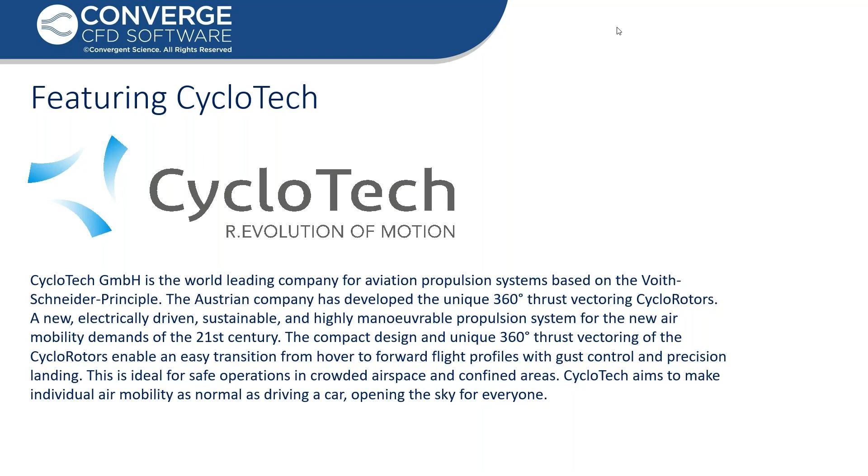How we utilize CONVERGE CFD for our cyclorotor simulations. In this webinar, I will briefly introduce you to the company, and then I will give you a short theoretical background regarding the working principle of the cyclorotor. In the second half of my webinar, I will bring you the CFD results. I also prepared 3 different CFD example cases. I hope you will enjoy it. So let's start.

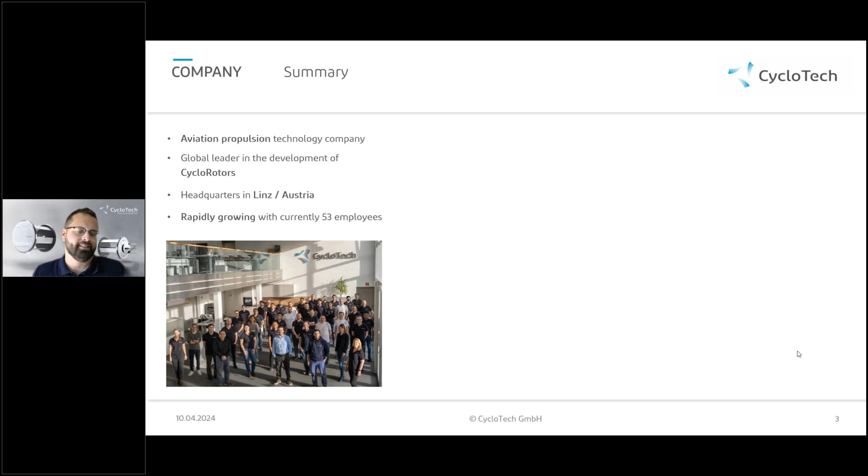CycloTech is an aviation propulsion technology company which is a global leader in the development of cyclorotors. The headquarters is in Linz in Austria, and it is rapidly growing with currently more than 50 employees. I can tell you when I joined CycloTech 2.5 years ago, we were less than 20. So it really has this buzzing startup environment that I really like.

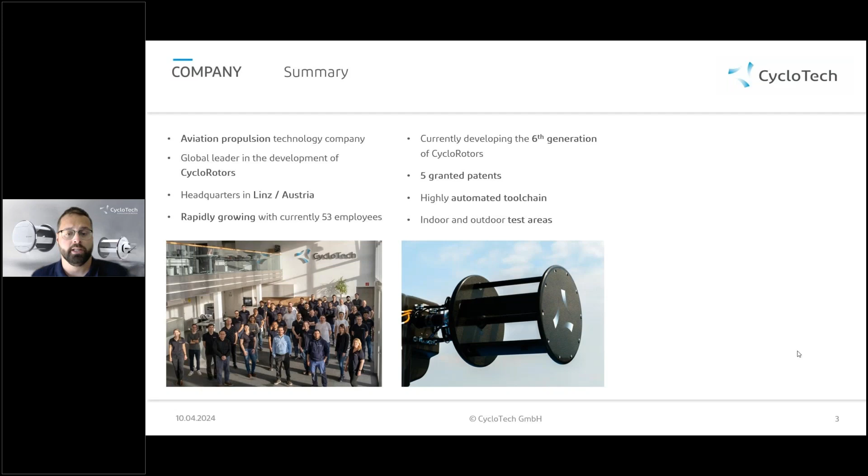Our main focus is the cyclorotor. Currently, we are developing the 6th generation of our cyclorotors. We were granted 5 different patents. We own a highly automated tool chain, and we have access to indoor and outdoor test areas. As Mattia mentioned, our vision is to open the sky for everyone, or let's say make individual air mobility as normal as driving a car. And we truly believe that the best way for this is powering the future eVTOL vehicles with our cyclorotors.

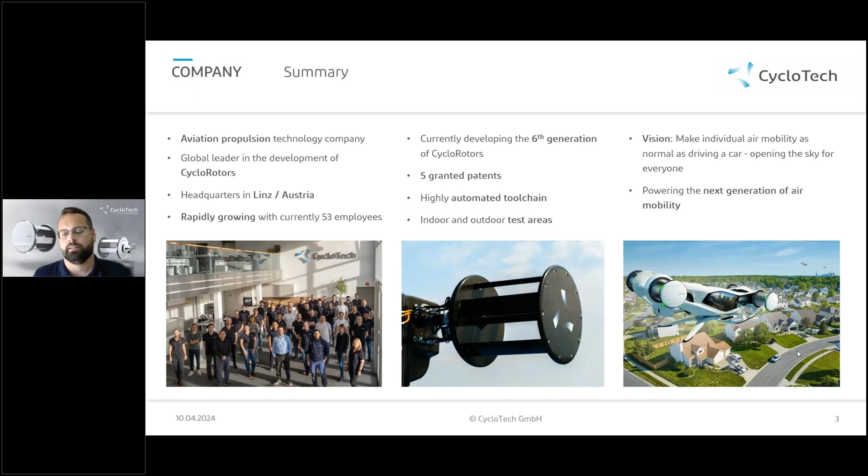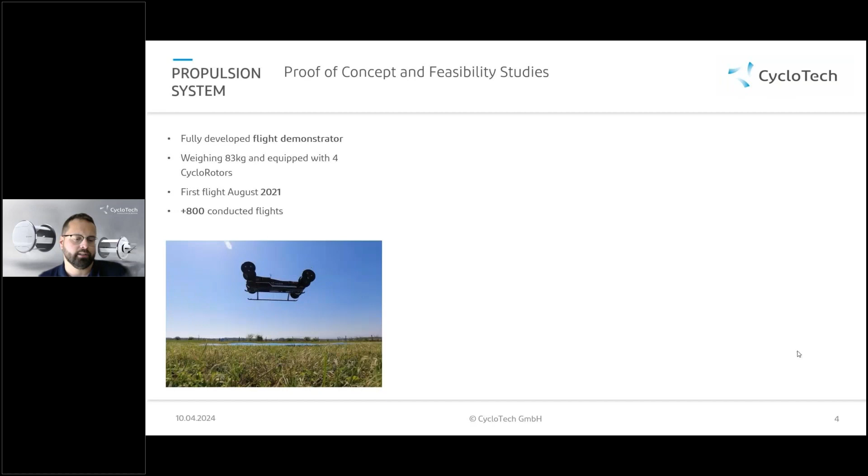We have a fully developed flight demonstrator, which weighs around 80 kg and is equipped with 4 cyclorotors. The first free flight was in August 2021, and from then on we conducted more than 800 flights. As you can see, this demonstrator can safely take off, land, and maneuver. Apart from the proof of concept, we also have feasibility studies.

One of the major ones was the eVTOL cargo drone, which was a joint feasibility study with Yamato Holdings. Yamato Holdings is one of the market leaders for parcel logistics, and they could benefit a lot from an advanced aerial vehicle with high maneuver capability. For that purpose, we designed together the drone depicted here, and it has a 45-kilogram payload and could fly up to 40-kilometer range. Both parties, Yamato and CycloTech, published a white paper about it. So if you are interested, I encourage you to look up these papers and read them.

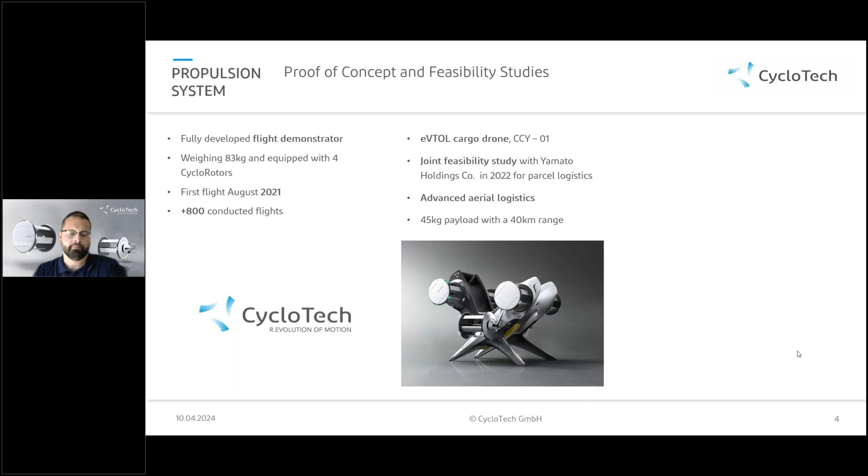After the Yamato cargo drone, we decided to come up with our aircar study, and this is how the CruiseUp was born last year. CruiseUp is an aircar concept with 6 cyclorotors, and as you can see, 2 of these cyclorotors are placed along the longitudinal axis of the vehicle. Because of this, the vehicle can easily go sideways without tilting the aircar. This is quite a unique feature among eVTOL aircars.

The top speed of this vehicle is 150 km per hour, and it has a range of 100 km. The 6 rotors also increase the redundancy of this vehicle, so in the event of one rotor failure, the aircar can land safely.

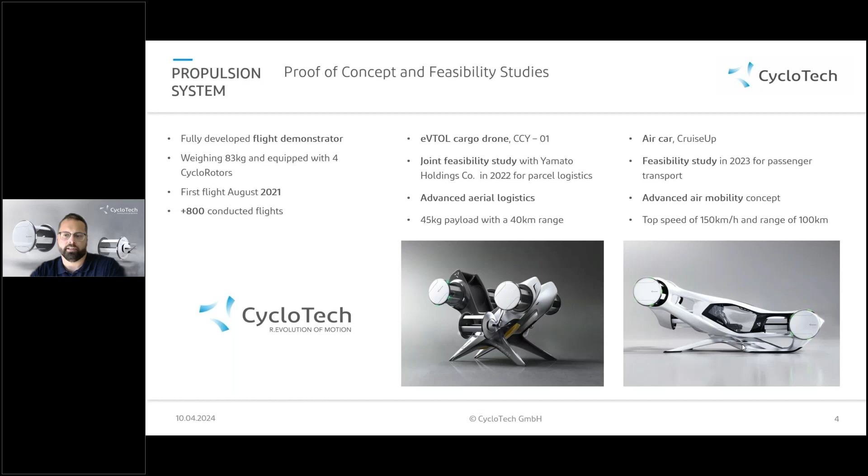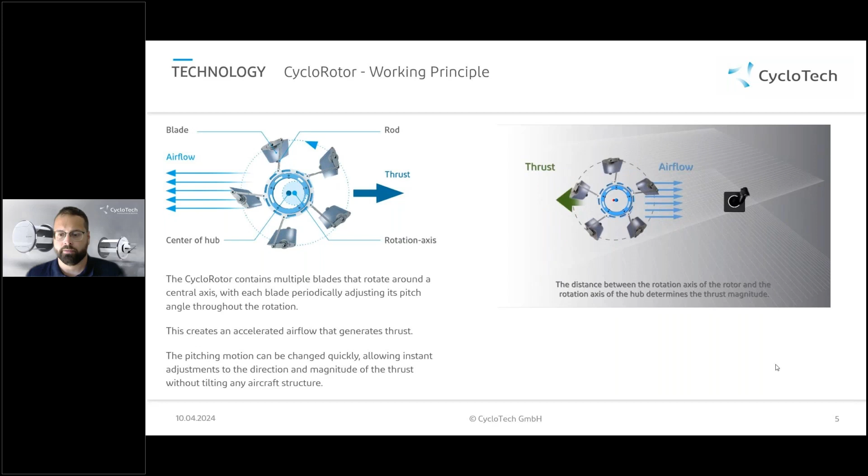An eccentric position of the hub causes periodical change of the angle of attack of each wing during one revolution. This accelerates the airflow through the rotor and results in a thrust. The distance between the rotation axis of the rotor and the rotation axis of the hub determines the thrust magnitude, while the position of the rotation axis of the hub in peripheral direction determines the thrust direction.

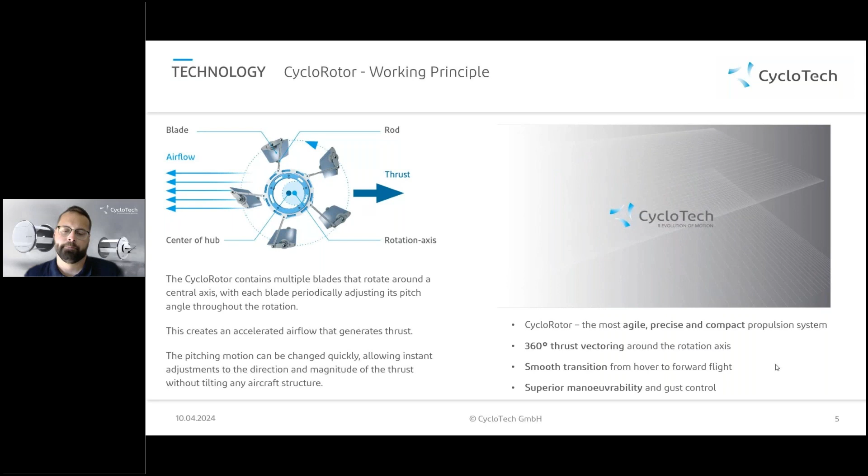To sum up, the cyclorotor is the most agile, precise, and compact propulsion system. With its truly 360-degree thrust vectoring around the rotation axis, it delivers smooth transition from hover to forward flight. And also, it provides superior maneuverability and gust control.

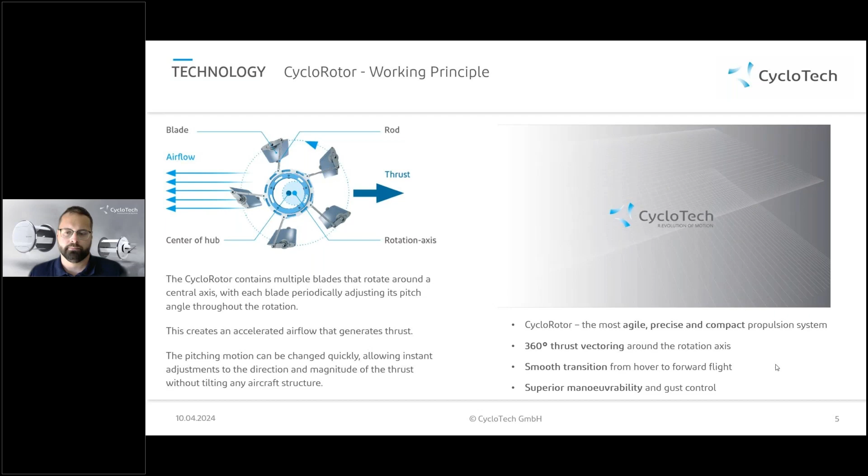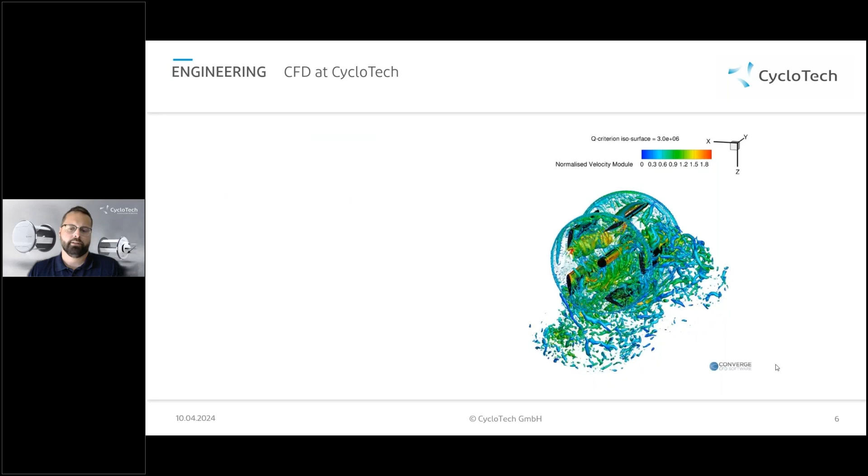Finally, we arrived at the CFD part of this webinar. I think this will be the most interesting for many of you. First, I would like to show you the areas where we use CFD at CycloTech. Then I will speak about what we benefit the most from in CONVERGE. And as I already mentioned, in the end, I will show you 3 example cases. 2 of these example cases will be with a Cartesian mesh, one with the acoustic analogy, and there will be an inlaid mesh case as well.

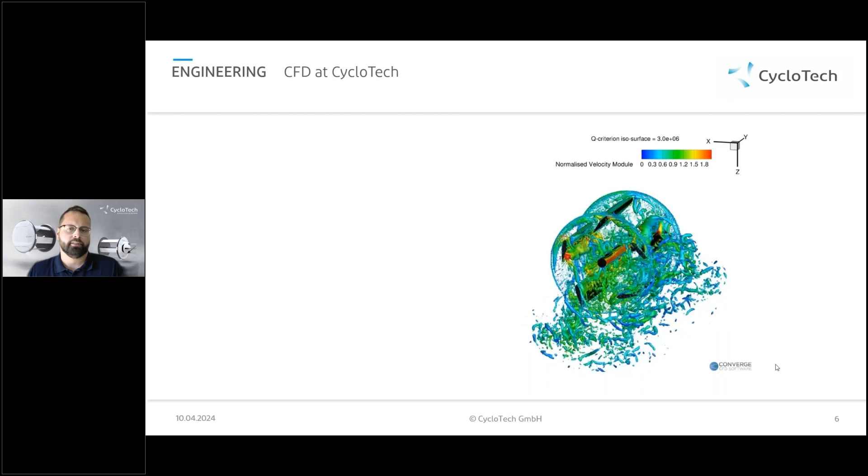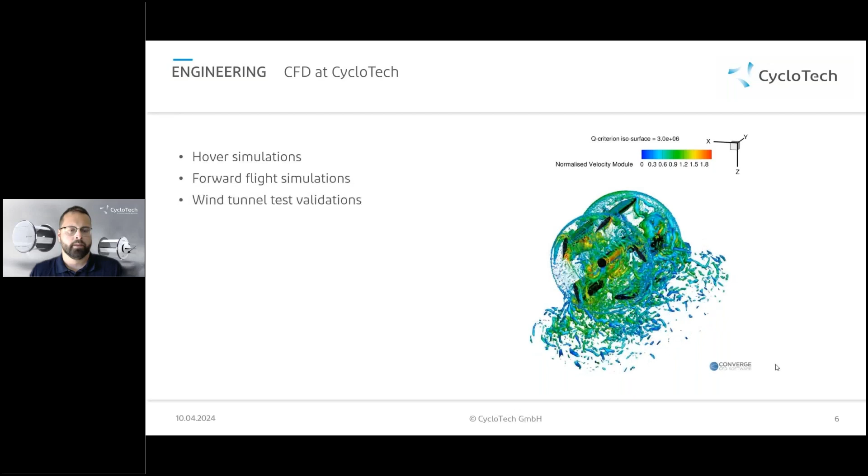So, at CycloTech, we do hover simulations, which means simulations without incoming speed. But we also do simulations with incoming flow. This is what we call forward flight simulations. Of course, we are aiding our design constantly with wind tunnel tests, and we also use these wind tunnel tests to validate our CFD results.

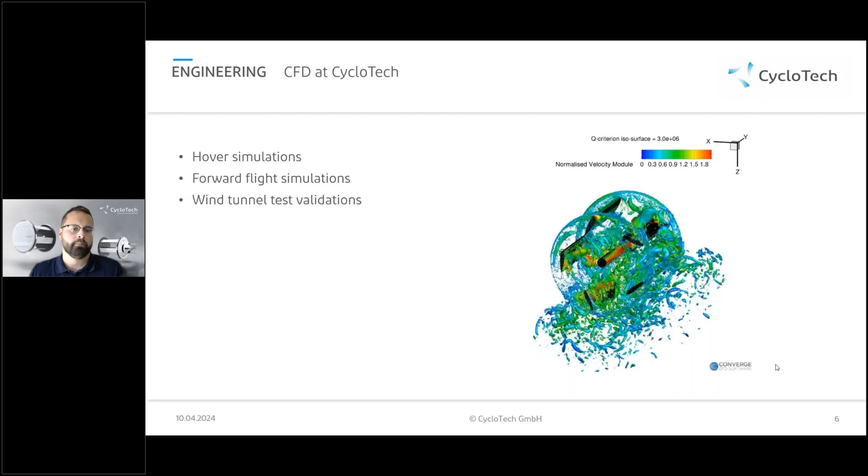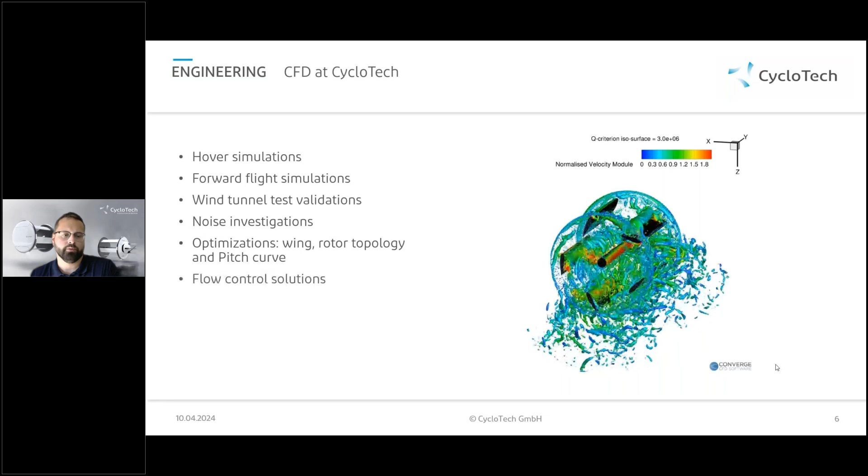Noise is a very important topic for us because we would like to gain public acceptance, and we would like to produce an as silent as possible rotor. Therefore, we also do computational aeroacoustic simulations. If we are talking about rotor development, optimization is a must. We do wing, rotor topology, and pitch curve optimization. Finally, we also use CFD for flow control solutions.

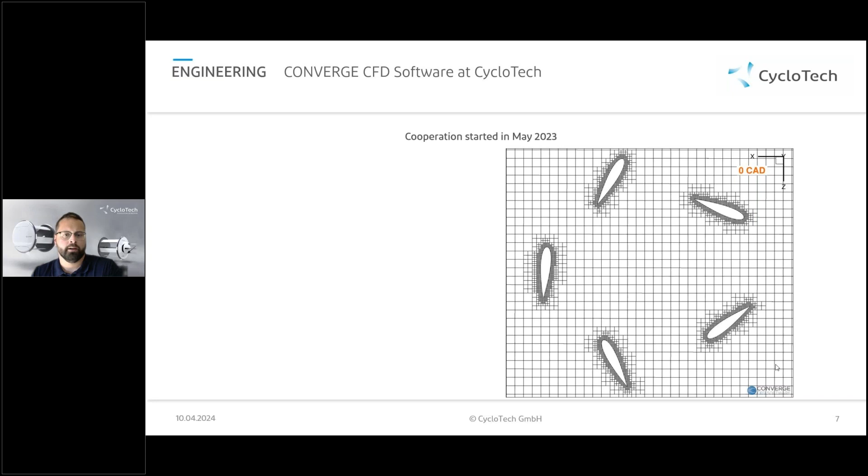So, our cooperation with Convergent Science started last year in May. So we can say that we are relatively new users of CONVERGE, but there are already many things that we like. The first of these is the user friendliness and the ease of use. I guess if you ever used CONVERGE, you know that basically you can learn the software within an afternoon. And basically this is what happened at our company as well. Colleagues without any practical experience of CFD started to use CONVERGE and CFD, and we could therefore increase our productivity.

Of course, after using CONVERGE, we don't want to make a mesh again. We benefit a lot from its autonomous meshing, and we also really like the Adaptive Mesh Refinement feature. Another feature which is very important to us is the ease of introducing complex motion profiles. I guess you have seen that our pitch curve is quite elaborate, but even this elaborate pitch curve can be easily introduced to the software, for instance, in tabulated format. And what is also very important is that the outputs and the inputs of the software are in a well scriptable format. We have custom-made post-processing scripts; I will show you not the scripts, but the results later.

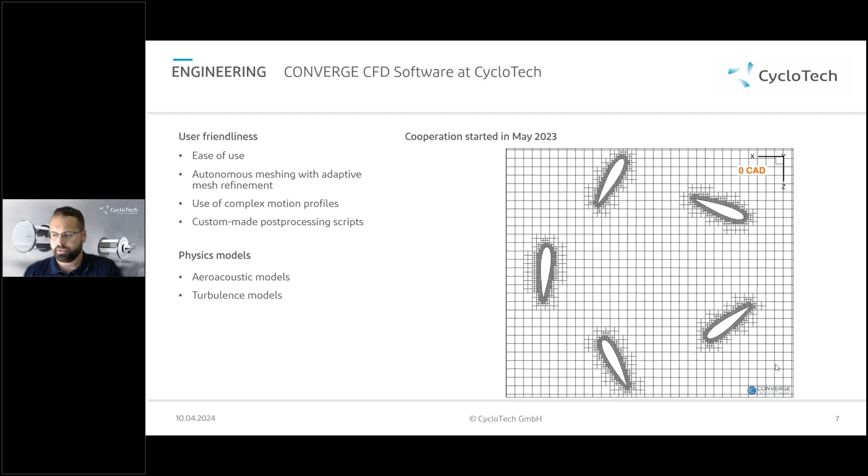We use aeroacoustic models and turbulence models from physics, so we don't use a lot of physics models from CONVERGE, but we are satisfied with what we are using. And we also use advanced features. One of them is the acceleration methods, like the grid scaling. You could see on this video that there was a grid scaling after 140 crank angle degrees. And we also use inlaid meshing.

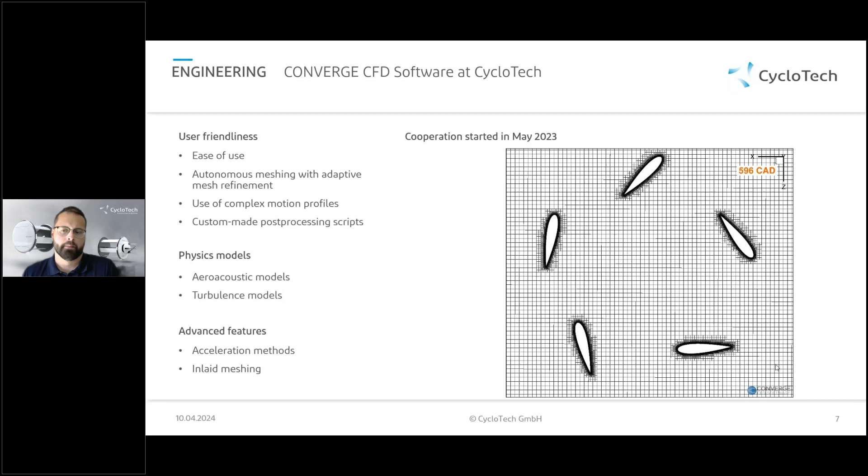If we are speaking about cyclorotors, advance ratio, abbreviated here as AR, is a very important dimensionless number, which is basically the ratio between the incoming flow speed and the rotor peripheral velocity.

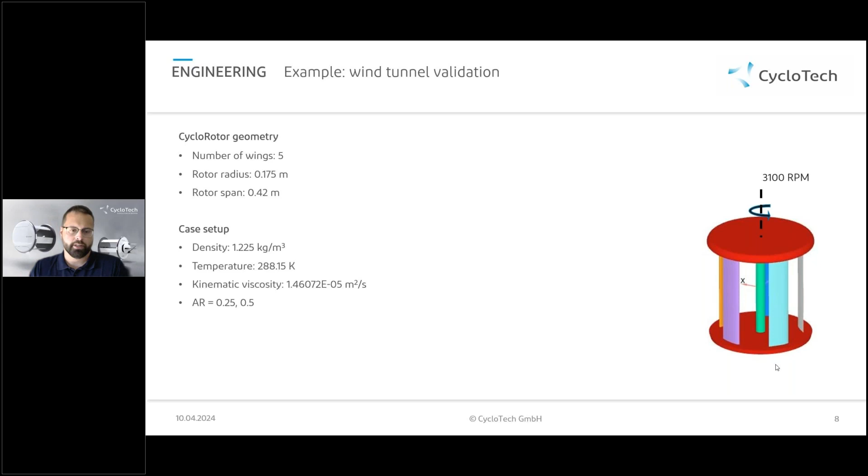Many of you might be more familiar with the term tip speed ratio, which is widely used in the wind turbine industry. I can tell you that the advance ratio is the reciprocal of the tip speed ratio.

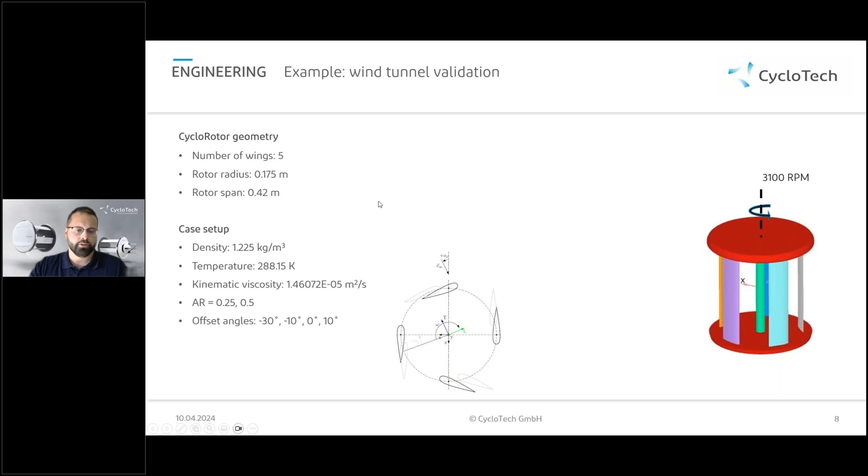Another important definition for us is the offset angle. Here you can see on this schematic picture what the offset angle is. Basically, it is just the angle of the incoming speed. Please note that this is just a schematic picture, so it has nothing to do with the other rotor. You can already see this from the number of wings; there are only 4 wings here. In this wind tunnel validation, we tested offset angles from -30 to 10 degrees.

We used a spherical domain with a diameter of 200 meters, and we filled up this domain with a Cartesian grid with a size of 2.2 million cells. We designed the mesh such that the finest mesh size is 1 millimeter, and this resulted in an average Y plus of around 50. For the turbulence model, we used large eddy simulation, namely the LES sigma closure.

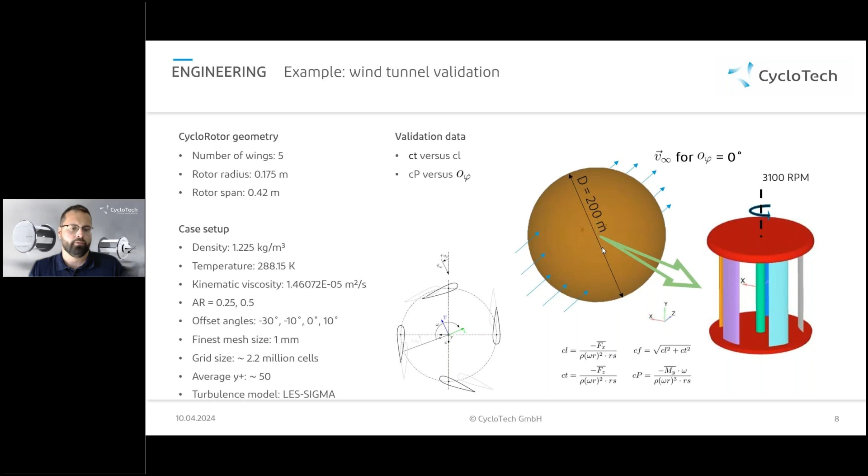For validation of this example case, we use the thrust and lift coefficients, and we also use the power coefficients as a function of the offset angles. Let's have a look at the results. In each result, there will be two sets of curves, 1 and 2, because we simulated this case at two different pitch curves.

In all graphs, the dashed black line represents the experimental results, while the solid green line represents the CONVERGE results. You can see that with the CT and CL parts, the trends are well captured. There is an exceptionally good match at advance ratio 0.25 here.

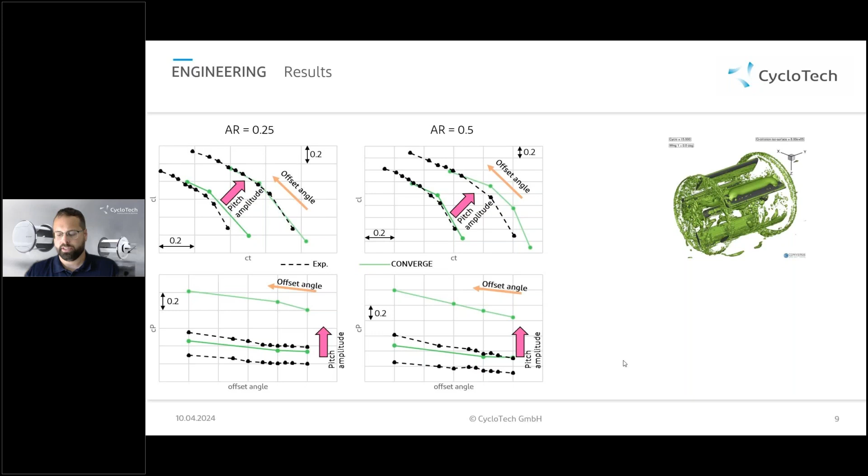However, if we have a look at the power coefficients, we can see that unfortunately the power coefficients are hugely overpredicted. We wanted to know why we have this overprediction, so we decided to do a deeper analysis of the flow field.

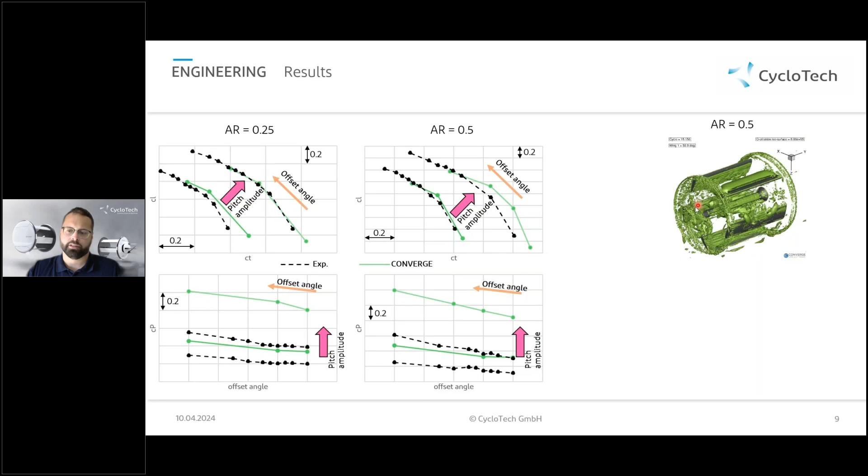First, we created this animation of the Q criterion isosurfaces to better understand the flow structures around the blades. I guess you can already see that there is a huge detachment region here on the frontal side of the rotor. But if you look a little bit behind the shaft, you can actually see another detachment region over there.

As a CFD enthusiast, I love these structures; I think they are beautiful. But we wanted to be sure that what we see is realistic and not coming from a lack of grid resolution, or from the fact that we try to resolve a highly unsteady case with a Cartesian cut cell method in the boundary layer.

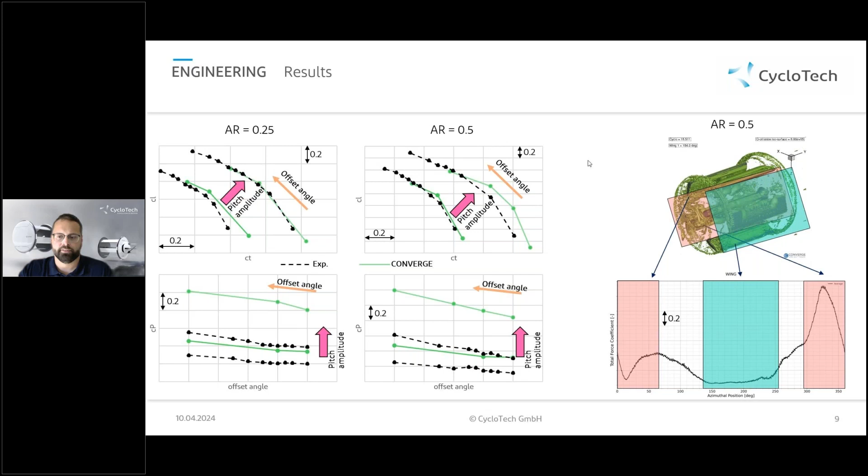First, we decided to refine the mesh, not on the blade, but in the close vicinity of the blade, because this was necessary anyway for the next topic, which is our noise validation. As you know, noise is a computationally very resource-intensive topic; you need a very high grid resolution in order to resolve the acoustic waves well.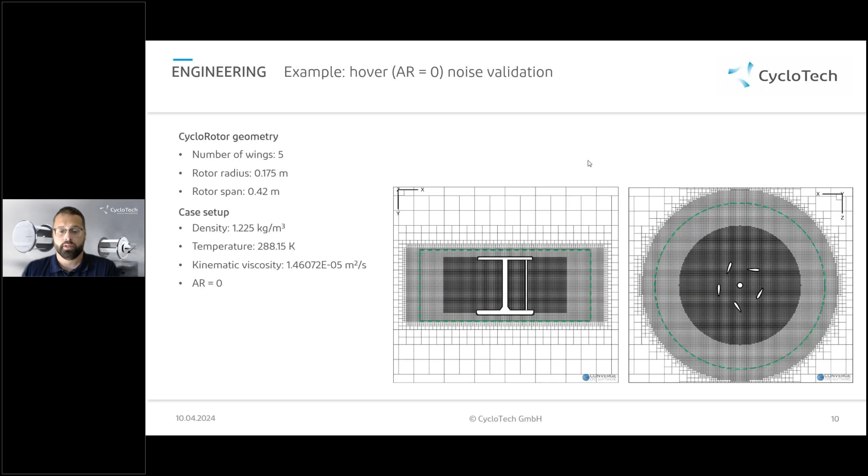In this example case we used the same rotor as in forward flight, but as I mentioned, it is a hover case, so there is no incoming flow. The domain here is a cylindrical one with a base of 200 meters diameter and a height of 80 meters. This big domain helps us avoid a lot of reflection from the outer boundaries. We also designed the mesh with very big cells close to the outer domain, which helps dissipate the acoustic waves in that region.

As I mentioned, we did not refine the mesh on the wings, so the finest mesh size is still 1 millimeter. But as you can see, we made a very fine region around the rotor. The average Y plus resulted in 45 with these settings. We still use the LES sigma turbulence closure.

In acoustic simulations, not only the grid resolution is important, but also the accuracy of the discretization scheme. We use the second-order central spatial discretization in order to eliminate the numerical diffusion from our simulations. And we also made the mesh such that there are at least 20 points per wavelength up to the 8th blade passing frequency within the permeable surface. We did this to reduce the numerical dispersion.

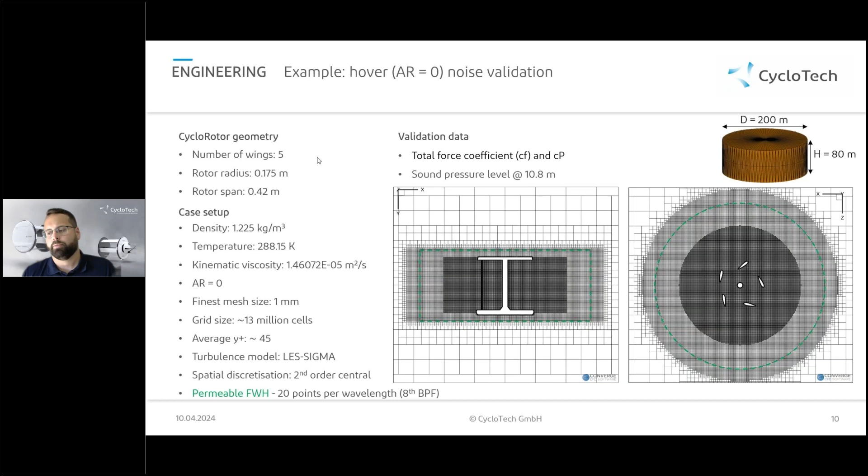For the results, I will present three sets of different results. The one denoted with the color blue is coming from our outdoor test. We carried out this outdoor test in 2022 in an airport close to our site. The setup was such that the closest reflective surface was at least 200 meters away from our rotor. We placed microphones all around the rotor at a distance of 10.8 meters.

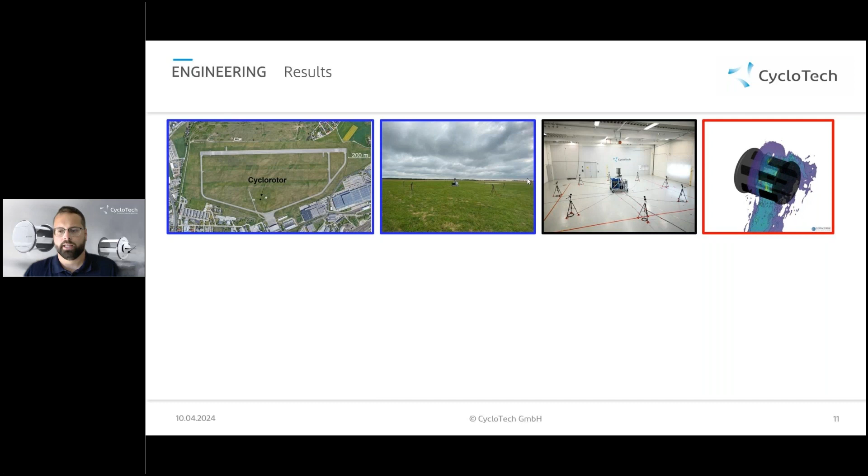The next set of results will be the indoor test results, and they will be marked with a black color. You can see that the microphones here are closer. They are just 5.1 meters away from the rotor, but the results were recalculated to 10.8 meters. You can also see that we did not use acoustic panels, so these results are polluted with reflections. And finally, the CFD cases will be represented with a red color.

The first two results that we can look at are the total force coefficients and the power coefficients. Here we only have results for validation from the indoor test case because these values were not measured with the outdoor measurement. What you can see is that CONVERGE follows very well the total force coefficients for different maximum pitch angles. However, with the power coefficients, we see similar trends to what we have seen in forward flight: at high pitch angles, the results start to deviate and CONVERGE overpredicts the CP.

Finally, let's have a look at the sound pressure levels as a function of maximum pitch angle. Here on this graph, the sound pressure levels minus the sound pressure levels for a zero pitch case are depicted. What we can see is that the smoothest results are created with the indoor test, and we believe that it is because of the lack of background noise. Of course, whenever we are testing outside, the wind is always there, and we should not forget that we were at the airport. Even though we tried to measure when aircraft were not passing by, there was still some background noise.

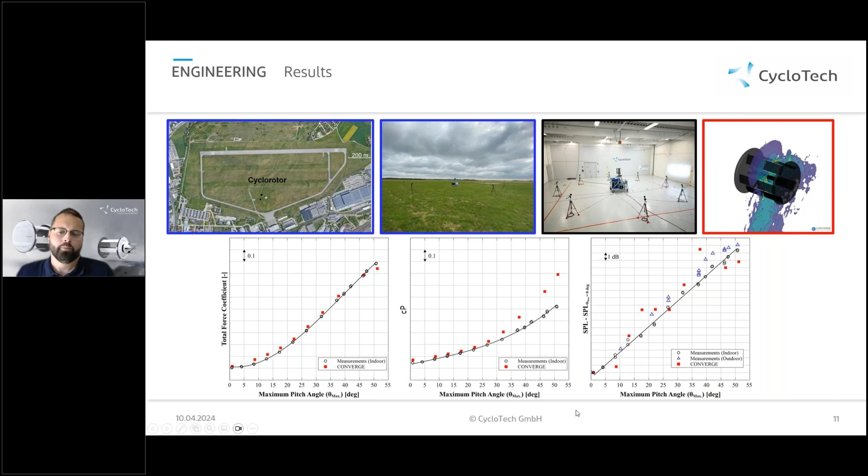So what we can see is that the outdoor measurements are also following the trend of the indoor one, but they have a bit bigger scatter. And finally, CONVERGE has the biggest scatter, but the trends are still captured, and we are quite happy with it. Considering that this is the first time we are doing an acoustic analogy with cyclorotors, we believe that these are quite good results.

Of course, if we are talking about acoustics, we would like to see the acoustic spectrum of the simulation. And here we can see the spectrum from the smallest to the highest maximum pitch angle. What we can see is that when the pitch is low, the mechanical noise becomes quite important, especially in the indoor test. Not to forget, here the microphones were closer to the rotor, and also the results are polluted with reflections. I would therefore say that CONVERGE more follows the trend of the outdoor test, especially here.

You can see that the broadband noise is very well resolved. And we are happy that the dominant tones are captured accurately, but they are a bit over-predicted. And quantitatively, I would say that the results of the tones are closer to the indoor test.

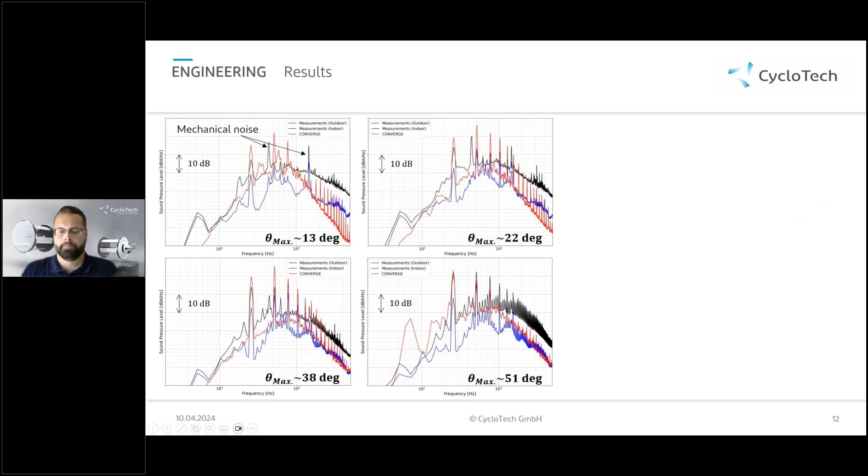We also wanted to see how the noise is perceived in space, so we created directivity patterns. This is a directivity pattern for the highest pitch angle, 51 degrees. What is depicted here is the directivity pattern of the first blade passing frequency. So it is the sound pressure level at different azimuthal angles minus the average sound pressure level over the perimeter.

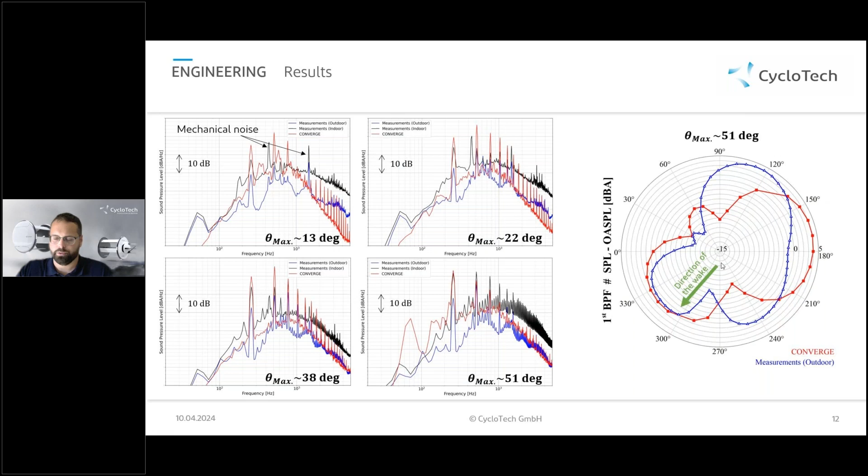What we can see is that the trends are kind of captured, I would say. Well, let's not forget that this is the most challenging case, but to be fair, I see room for improvement. But as I already mentioned to you, we have quite many ideas for how to further improve these simulations.

Before moving to the inlaid mesh case, I would like to show you the animation of the flow field. On the top row, you can see the animation of the normalized velocity module, while on the bottom row, you can see the force vectors over the cycle and also the direction of the total force. By the way, I should mention that these top row animations were created with our custom-made post-processing script. So this is a good example that shows how good the outcomes from CONVERGE are for making scripts with them.

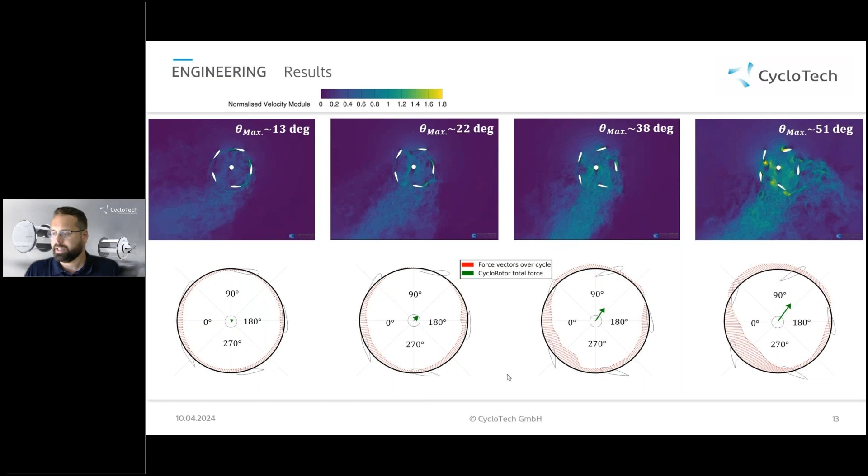What you can see is that if we are looking from the lower to the higher pitch cases, the flow field is dramatically changing. With the low pitch, we don't really see a designated wake, while with high pitch, the wake is very well demarcated. And what we also can see is that we still have these vigorous detachment regions here and there. So to finally find out whether these detachments are responsible for the simulations overpredicting the power a lot, we decided to do inlaid mesh simulations.

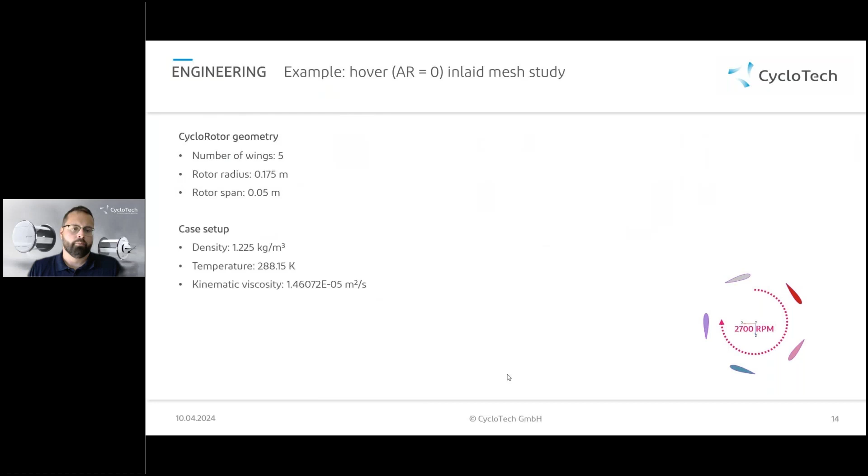In this inlaid mesh study, we again use the hover case, so there is no incoming speed. We reduced the RPM to 2,700. But what is more important here is the span of the rotor, which is now just 5 centimeters. Or let's say that we ensured that the domain is so small in the third direction that there is only one grid cell in the spanwise direction. Or in other words, this is a 2D case. At top, bottom, and side walls, we use the symmetry boundary conditions, and we chose the diameter of this disc to be 33 meters.

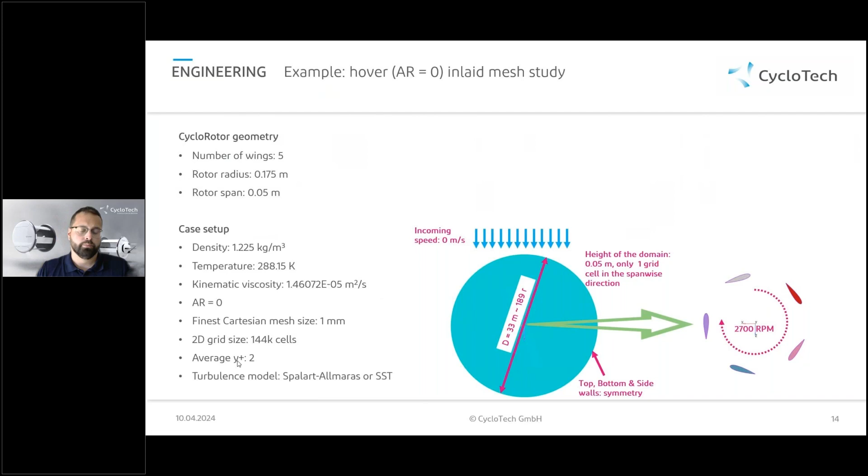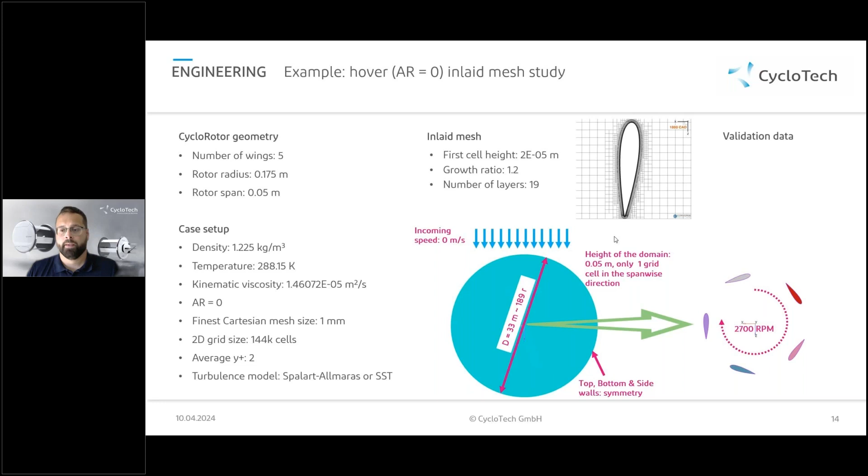The finest Cartesian mesh size was kept at 1 millimeter, but thanks to the inlaid mesh, we could manage to bring down the average Y plus to 2. For turbulence, we use the Spalart-Allmaras or the SST models. Here you can see a picture of our inlaid mesh. We pushed the growth ratio until 1.2, and altogether we had 19 layers. For validation, we used the power coefficient.

Here you can see two animations. On the left-hand side, a case without inlaid mesh, and on the right-hand side, a case with inlaid mesh. Both of them for the maximum pitch amplitude, or the maximum pitch angle, which was 51 degrees in the previous case. As you can see, no surprise here, the no inlaid case is producing these detachments here and there. If we have a look at the inlaid case, we can still see detachment here, but not as strong as without the inlaid case, and we don't really see any detachment here.

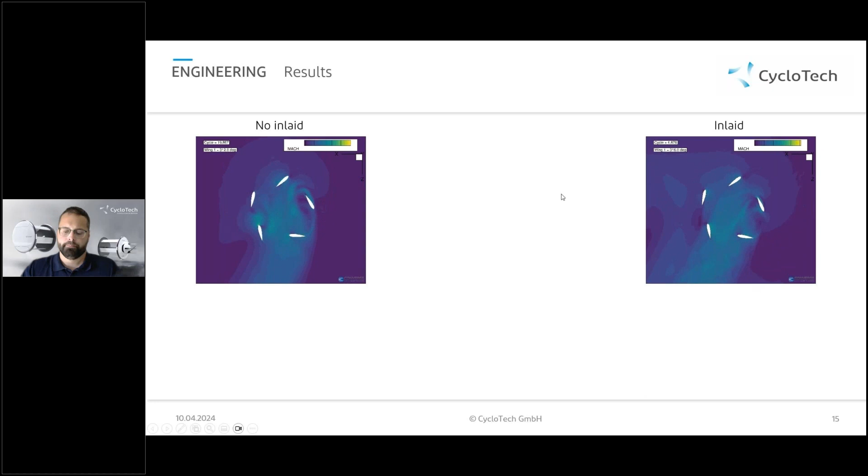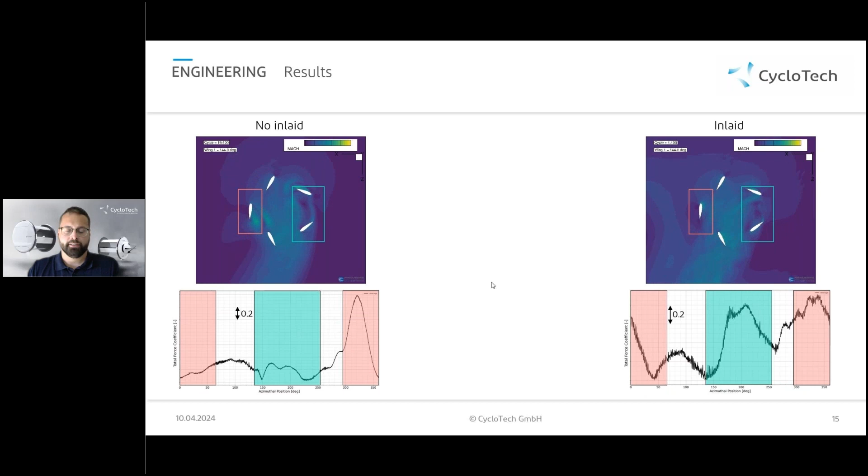So to again look together at the flow behavior with the total force coefficients, what we see is that thanks to the not strong detachment, the flow recovers much faster, it reattaches much faster in this region. And in this region, we don't see this very strange peak in the total force coefficients. What did this bring us for the power coefficients? Well, actually, I can happily tell you that with this solution, the overprediction of the CP radically reduced. Now it's only just 12%. And I think considering that this is a 2D case, this is a very, very good result.

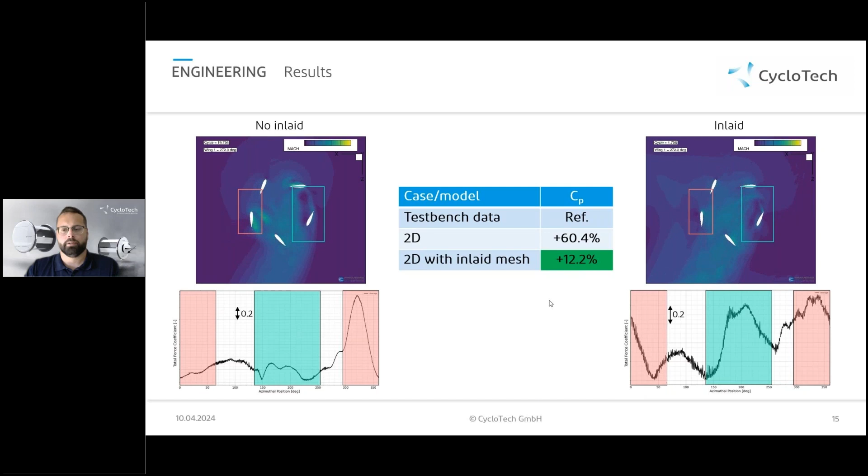So arriving at the end of my presentation, let's have a wrap-up of what I was speaking about. We have seen that CFD aids and simplifies the aerodynamic design of our cyclorotor. We also saw how CONVERGE brings numerous advantages for our design process. We benefit a lot from the advanced meshing techniques, grid scaling, AMR. These are all techniques that we are using every day. And I was very happy to see how inlaid meshing increased the accuracy of our simulations. As you saw, we don't use a lot of physics, but what we use is working well, which is always good. And we also really like the custom-made scripts that we can do with CONVERGE.

What I was not speaking about, but is important, is the excellent parallelization of the software on our HPC and the world-class support service. What's coming next for us? We are very excited to extend the 2D inlaid case to a 3D inlaid mesh simulation. We would also like to test the software for multi-rotor simulations. We would also like to do wing force validations with CONVERGE. And of course, at one point in the future, we would like to use the software for rotor and wing optimization.